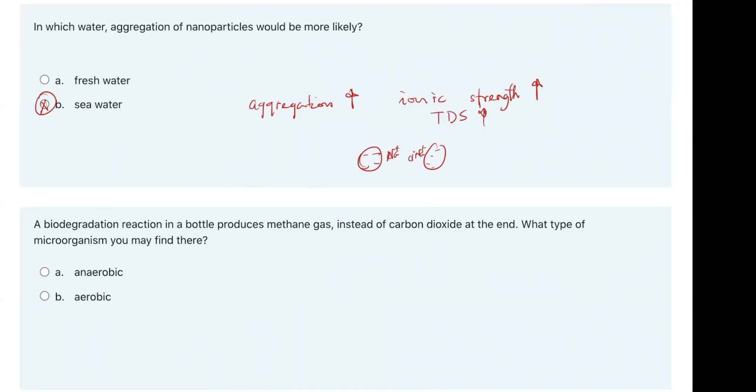One question was: in which water will aggregation of nanoparticles be more likely? The answer is seawater. The reason is that aggregation increases if your ionic strength, or concentration of salt, dissolved salts, or TDS (total dissolved solids), increases. Dissolved salts are more present in seawater, ocean water. The idea is that particles have a similar charge, so positive or negative, and they will repel each other. But if you have lots of ions - let's say Na+ - they will shield that charge, meaning the particles will not feel that charge anymore. So the repulsion will be less, meaning they are more likely to stick with each other.

Second question: a biodegradation reaction in a bottle produces methane gas instead of carbon dioxide at the end - what type of microorganism might you find there, aerobic or anaerobic? Aerobic means oxygen, anaerobic means no oxygen. If it's aerobic, carbon reacting with oxygen usually produces carbon dioxide. If it's anaerobic, it goes to CH4, meaning no oxygen. So since it produces methane, it has to be anaerobic - definitely not aerobic.

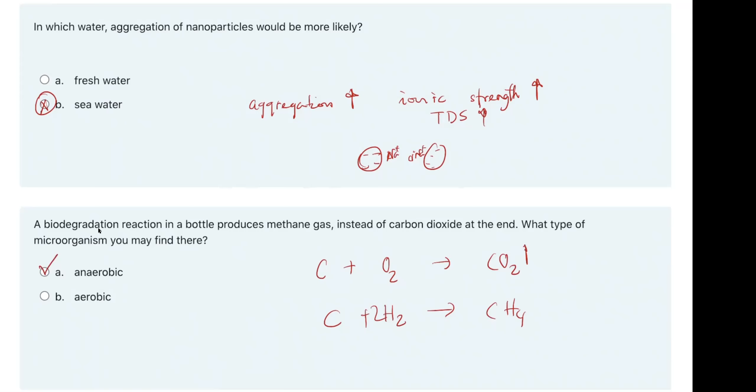The third question was: a chlorinated organic is more persistent than a fluorinated organic, assuming both chemicals have similar numbers. True or false? Think of it this way: chlorinated means it has a carbon-chlorine bond, and fluorinated means a carbon-fluorine bond. Which one is more persistent depends on which bond is stronger and harder to break. Since this is a covalent bond, strength is based on electronegativity. Fluorine is the most electronegative atom, so it attracts the other atom more efficiently, making the carbon-fluorine covalent bond the strongest, and therefore the more persistent. So the statement that chlorinated organic is more persistent than fluorinated is not true - the answer is false.

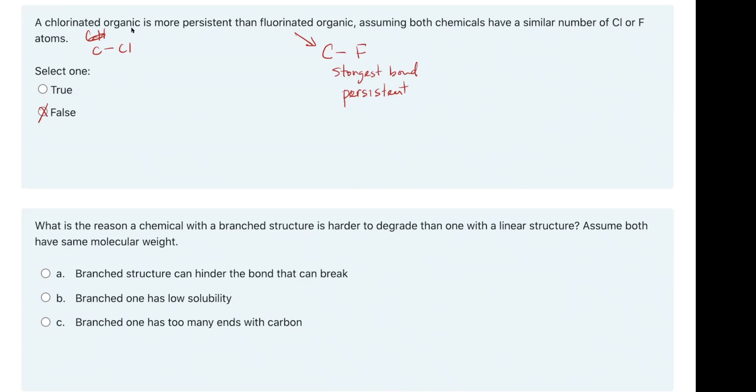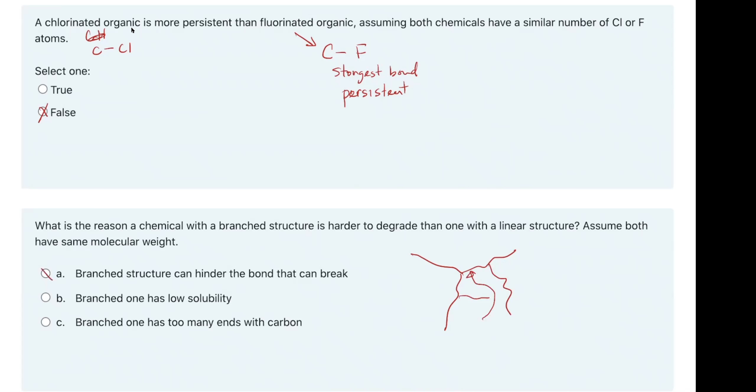What is the reason a chemical with a branched structure is harder to degrade than one with a linear structure, assuming both have the same molecular weight? If you think of organic carbons with a lot of branching, the branched structure can hinder the bond that needs to break. A branched one has too many ends with carbon, but that doesn't really change degradation. The key point is that branch structure can hinder the bond that needs to break. So if it's a branched structure, microbial enzymes have to break this bond, but they don't access the bond very effectively. That's mostly how you can explain it.

Root uptake rate is not affected by the following factors: transpiration rate, concentration of pollutant in soil, and concentration of pollutant in water. If you have a tree, how much pollutant moves into the roots? Transpiration rate is how much water it can draw, and most pollutant uptake through roots happens through water, so that option cannot be the answer. Concentration of pollutant in water is obviously a driving factor, so remove that too. That leaves concentration of pollutant in soil as the right answer, because the pollutant in soil itself doesn't move - it has to move out of the soil first, so it doesn't directly affect uptake. That's the most likely answer.

Is phytoremediation technology the best or the least expensive among all technologies? Select one - well, there's no real option to consider here. Looking at the slides, this was shown to be the least expensive option.

Which one of the following processes doesn't involve taking pollutant inside the plant root? Phytovolatilization, phytoextraction, phytostabilization. Phytovolatilization means you enable volatile pollutants to escape to the atmosphere - usually that goes through the roots and then leaves the system through leaves. Phytoextraction is where you take the pollutant from soil and extract it by harvesting the plant, so that also goes inside the plant. Phytostabilization is where the root system changes the pH of the surrounding environment, allowing pollutants - particularly heavy metals - to precipitate. That happens outside the root because it involves changing the water chemistry. So this is the answer.

Phytostabilization changes pore water pH - I already explained how it can stabilize pollutants this way. So the answer is true.

The last question: nanoremediation using zero-valent nanoparticles - this type of nanoparticle is more efficient in saline groundwater. This is the exact opposite answer to what I discussed previously. The reason zero-valent nanoparticles are efficient is about delivery, and the biggest problem of delivery is aggregation. Once particles aggregate, they get removed from the system because they can be filtered out. So saline conditions actually cause more aggregation, making this answer false.

Out of the 9 quiz questions, many of you scored well, with an average around 90%.

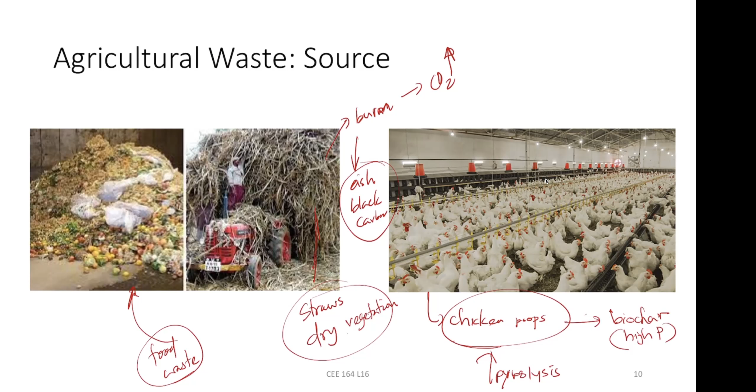So if you take the chicken poop, you can pyrolyze it. If you pyrolyze it, you can produce biochar with high phosphate. And if you remember, phosphate is extremely difficult to get because it's limited - phosphorus doesn't cycle, we get most of it by mining, and there's a limited amount available. So this means we can reuse it through this process.

Professor: how does animal excrement management differ from human discharge management? Well, if you're talking about animal poop, psychologically it's less of an issue. Everything has pathogens, whether human or animal poop, but compositionally it all has nutrients - nitrogen and phosphorus rich. That's why animal poop is used for composting, whereas human poop, psychologically, is something bad for us, so we don't really use it as a nutrient source.

But in return, if you think about how this actually happens, most human poop goes to wastewater, and that wastewater turns into biosolids, which then become fertilizers. So it goes through a certain process that removes a lot of pathogens. I don't think we can manage human waste the same simple way - that's the only difference. Did this answer your question?

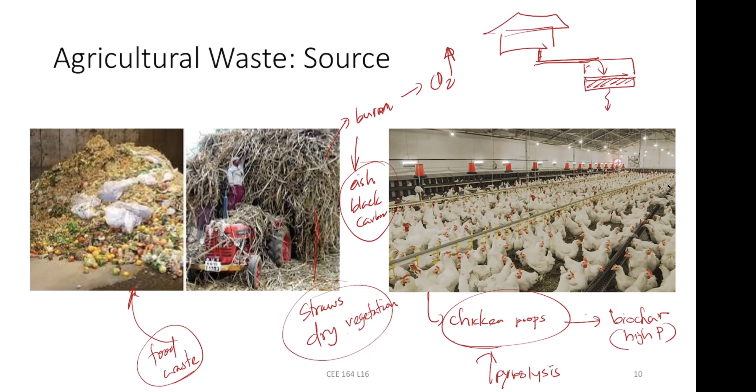Once it's filled, it takes many years, obviously 10-15 years. Once it's filled, you replace it with another location, but we don't use it - that waste is already there. That's the reason, because psychologically nobody wants to do anything with that. But for a large city, we use it as a biosolid, so we are applying those back.

And this is another type of waste - this is the lagoon I was talking about. If you have ever visited any cattle farm, they live there, meaning they are not going to go to a restroom - they won't say 'okay I'll go to the restroom' - they'll just poop and pee there. So they have this water system where the farmers clean the floor using water. They have to remove the cattle, clean the floor, then bring them back. That mixed water, the wastewater, is dumped into this system like a lagoon.

And as you see over here, that's not because of the waste - it's because of the bacteria or pathogens, a certain type of algae that grows here. That's one algae that doesn't look green - so you see over here.

But the biggest challenge here is not the pathogens, because you can remove them from a treatment system. The challenge is the antibiotics and hormones, particularly antibiotic resistance genes, because a lot of these animals take antibiotics at much higher concentrations than needed, and those end up in the waste. So if you have lots of antibiotics in this waste, any bacteria living there become conditioned to that system. They develop this antibiotic resistance gene, or defense mechanism. That means if those spread around the world, and we get infected by these pathogens, we can't be cured with the same medicines we normally take. That's why this is a really big challenge nowadays.

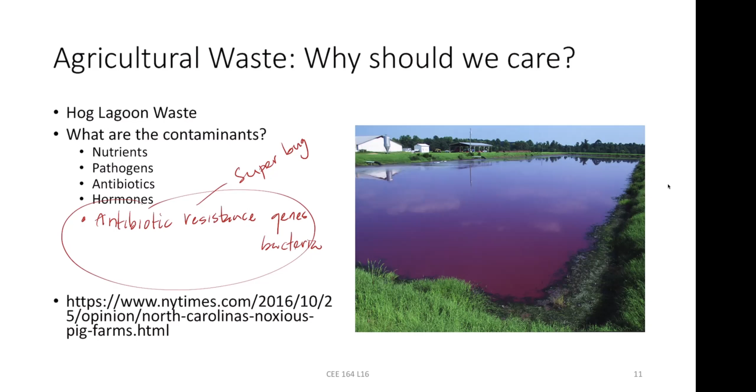And just to give you an idea, there have only been three or four kinds of new human antibiotics developed in the last 50 to 100 years. So it's really expensive and difficult to develop antibiotics. Once we run out of those antibiotics, we can't keep up - bacteria evolve faster than we can develop antibiotics for. That's why this is a big concern now: how we can minimize these resistance genes from becoming common. One of our professors, a colleague in our department, Professor Jenny J., is working on this particular field much more than any of us.

All right, so we discussed this one, how the waste is being managed. The solid goes here as you see, solid waste is directly applied to the field as fertilizer if it is pathogen-free, if it is dried, or by any other possible way. Otherwise, it can be kept in locations and disinfected, and then applied. But if it's a liquid or mixed liquid, then you have to put it in a lagoon. Some of it can also be put in a digester or storage structure before you discharge it into land applications.

This is feasible if there are no antibiotics or hormones involved. But if there are pesticides, antibiotics, and hormones, then you don't want to apply those in agriculture, because then you are spreading the same thing—basically taking medicine without being prescribed. So that's one of the challenges. With all these things, you can produce waste, or be exposed during production, collection, and transfer, so be aware of those aspects.

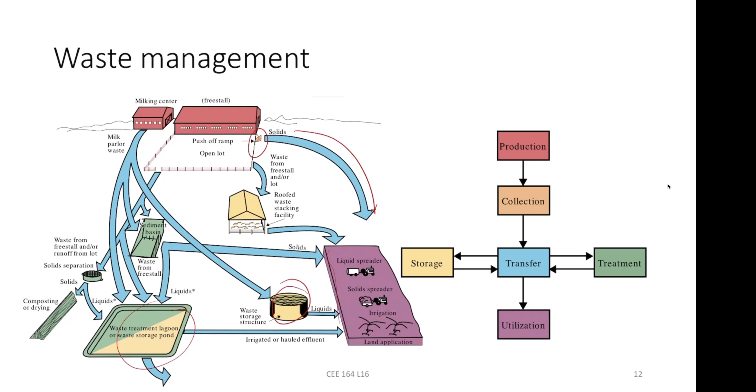This is just to give you the amount of food loss, which is another agriculture loss—almost 50% of what we produce is wasted. Worldwide, the reason is that unlike the US, many developing countries where a lot of people live do not have cold storage. That means any seasonal food they produce, they have to eat it, and there is a limit to how much they can consume, so most of it gets wasted.

And then also, even in a country like the US, because of supermarkets and such, we tend to buy products which are very specific—look how they look, all that stuff. So that means even a carrot which is perfectly fine, but just because the shape is a little curved, gets wasted. There's really lots of waste even before it comes to the consumer.

Once it comes to the consumer, there is another type of waste. We buy a lot more than we need, or we buy and forget to cook it, and it becomes waste. Then when we cook it and don't eat it, that also becomes waste. So food waste is typically a lot more than what we think, which is amazing when you consider how many people are dying because of malnutrition or lack of food. Here we are wasting food, and it's not just one country, it's many places. It's a supply issue as well as transportation to the right locations.

We discussed this before, but I want to reiterate: if you have food produced at home, in a business, or at restaurants, if it's biodegradable, you have to manage or find a way to transport it. If you transport it to a location where it can be reused or used for energy harvest, that's useful. It goes through some pre-treatment, then pasteurization, just to make sure there are no pathogens, so it can be used or stored for a longer time.

Then it goes to the digester—you can call it an anaerobic digester. It produces biogas, and that gas is stored, then you can heat it or use it in an engine to produce energy. That energy can go to electricity and provide lighting. After the digester, you also have a waste product—every digestion produces some kind of solid waste that can be used as nutrients or fertilizer.

This is a different process: you separate liquid and solid, and it becomes solid nutrients. Then you apply it on the farm or park, and the park produces organic waste or biofertilizers. Then you produce food, which goes to restaurants and everywhere else. Some food can also directly go to the digester if it's food waste. Any natural gas produced can also help supply energy or fuel for automobiles.

There are different current technologies we can talk about—anaerobic digesters we already discussed, so I won't repeat that. There's something I usually do in class that may not be relevant here; maybe we can discuss it after class, covering different new ideas on how to manage food waste or challenges. For now, let's go through these slides, then we can have an open-ended discussion.

As I said, all this waste—this is just one cycle of how we can produce food waste and energy. But it doesn't have to be just food to energy; it can be a multiple stage process. Food can make something, and that can be used, and that waste goes to another production.

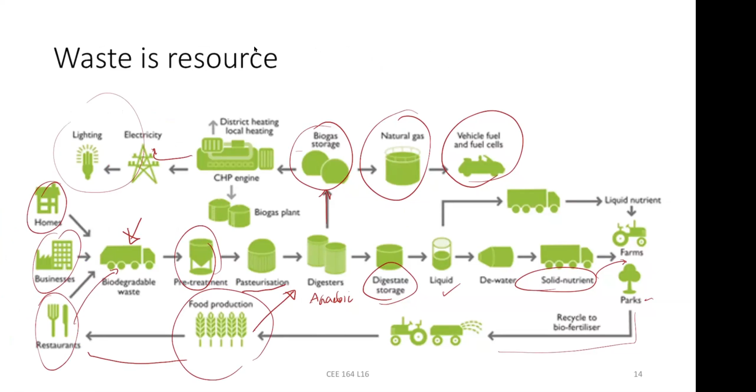So all those steps can be done, that's why there are different options. For instance, plant waste doesn't have any pathogens, doesn't have much contaminants, so it's a lot easier to produce black carbon or biochar as filter materials.

Then if it's a lot of liquid, you can treat them as wastewater, or create algae like we learned in the last class. And the remaining products, if it goes to a digester, most of the stuff is already produced, or you remove carbon as a fuel, methane gas or fuel.

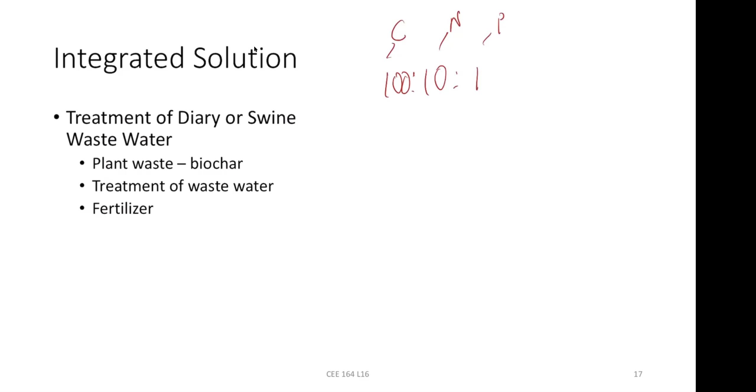Every carbon material, if you think of our body, 100%, the typical ratio is 100 to 10 to 1. So this is carbon, this is nitrogen, phosphorus. So this becomes methane or biofuel.

What about nitrogen, phosphorus? This becomes fertilizer. Okay, so that's the whole idea here.

So if you don't want to do any of this, you can burn all of it or pyrolyze it, and that produces biochar. Biochar is a carbon sequestration product, in the sense that if you just leave this food waste, it becomes carbon dioxide or methane gas within a few days. Whereas if you make it biochar, the carbon is locked for the next 100 plus years. So that means this carbon will not go back to carbon dioxide anytime soon.

So you are disrupting that cycle, meaning you are keeping more carbon as a solid, as a sequestration product underground. I think that's all in terms of food waste.

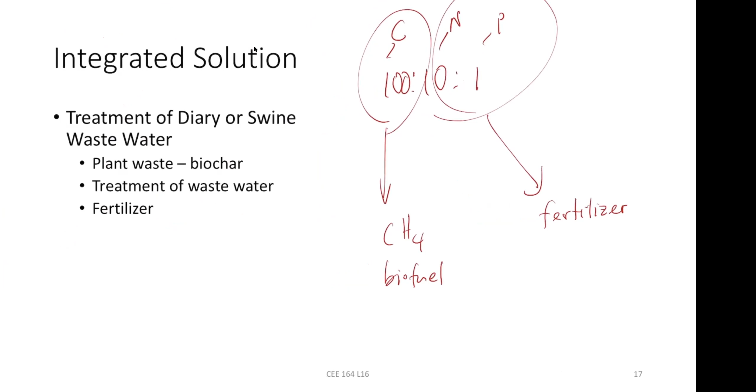So now let's discuss this one. Again, this is an open-ended discussion. What we should do is think of some challenges or solutions. So let's think of some challenges. It doesn't matter which team, since I can't see who is team A or B right now. So let's have a discussion about what's the biggest challenge you guys can think of now that you've learned how this is managed. What could be the challenge for food waste management?

Challenge and opportunity, let's write it this way. Not team A, team B, I'm going to write what's the challenge and opportunity. Opportunity means solutions. Okay, so whatever comes to your mind, it doesn't have to be in any order.

I feel like a big challenge on the consumer end is that sustainable management of food waste kind of relies on the consumer deciding to compost their food rather than just put it in the trash. And it relies on the consumer being knowledgeable enough to understand what things can or can't go into the compost. Yeah, I think that's where it starts.

But let's think of who is the biggest, or not. Let's not say consumer, it's more about who is the biggest producer of food waste. Consumers like us, single households, are definitely a source of food waste production, but what about others? So consumer or producer.

But to create the materials required to harvest solar energy, like solar panels, there is a lot of waste. The production of solar energy consumes resources and has a carbon footprint, and once you install all these solar panels, how long will they last, and what will you do with all the waste? So there has to be some life cycle assessment for that. Then there are other types of waste—if you think of petroleum, the extraction and purification all has lots of waste. The biggest energy production here is coal, and coal produces lots of waste like coal ash or fly ash. So there has to be an important way to manage this waste.

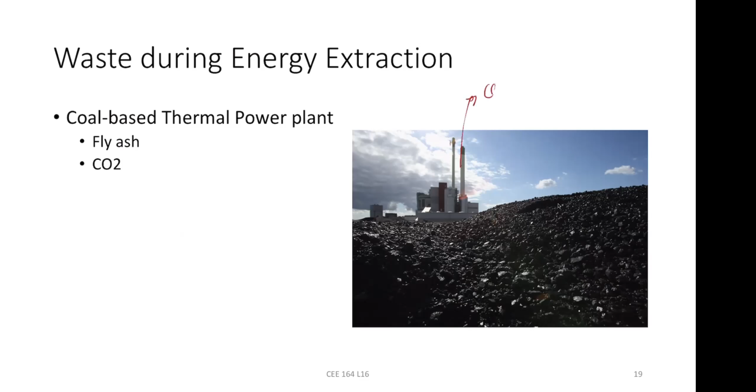These couple of slides will discuss more about how to manage this waste during energy harvest. For instance, here's an example of a thermal power plant, where coal is the raw product—you burn the coal, get heat energy that creates steam, and the steam is used to produce electricity via turbine. The biggest waste you get is carbon dioxide, so CO2 goes there, and what's left over is ash—the fly ash. But fly ash can be used in multiple different ways. So if you see, what's the difference, what's the common between these two pictures? Anybody can say? Guess.

What's common between these two? What do you see over here? On the left side is a building filled with all this coal ash, after a spill in the Kingston fossil plant in Tennessee. And on the right side, you have this big colosseum.

Take a guess, one word is used in between those two captions. Is it that the Romans used different forms of ash in constructing their buildings, as the type of concrete they used? Exactly. So if you think of what they used to make this big colosseum, or the clay they used to make the structure stronger or last longer, it's made up of ash.

So this just gives you an idea that every waste you produce may have some use before even you find something else to do with it.

As an example, 130 million tons of coal ash was generated in 2014. It's been increasing, but over time we are lowering the amount of energy produced by coal, so as that decreases, the amount of coal ash is going to decrease. It's declining now - the number of coal power plants, at least in the US, is a lot less. In fact, in California, I don't think there are any coal-based productions.

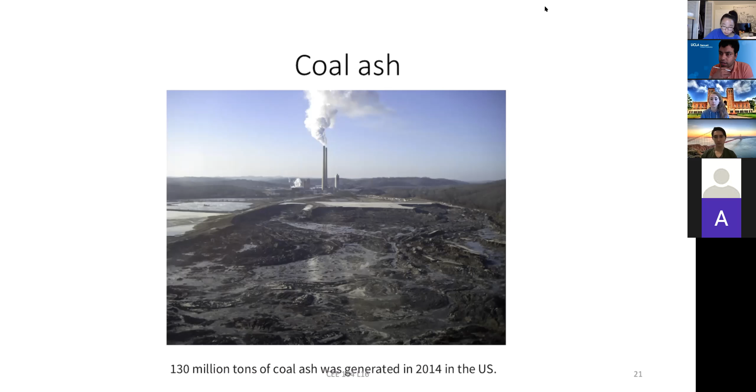So what is in the coal ash? It's basically many inorganic minerals - calcium hydroxide, calcium carbonate, sodium, calcium carbonate, magnesium carbonate, and oxide hydroxide.

That's why ash has a very high pH, around 11 or 12. That's the reason cement pH is also high. If any water goes through cement, the pH is alkaline, around 10 or 11. So if you get concrete and put it in water, the pH will rise because of this ash.

But if only those things were there, it wouldn't be a problem - it also has lots of metals. If you think of it, our body needs some micronutrients, but also has traces of mercury and arsenic in small amounts. Fish and other organisms accumulate mercury, and plants also have some amount of mercury. That's why every time there's a wildfire, you see a spike in mercury concentrations.

Once you burn all of that, 90 to 99% of the mass is gone - all the carbon is gone. So what remains is a concentrated form of these inorganics. That's why the concentration of heavy metals is much higher in ash, because of that concentration process.

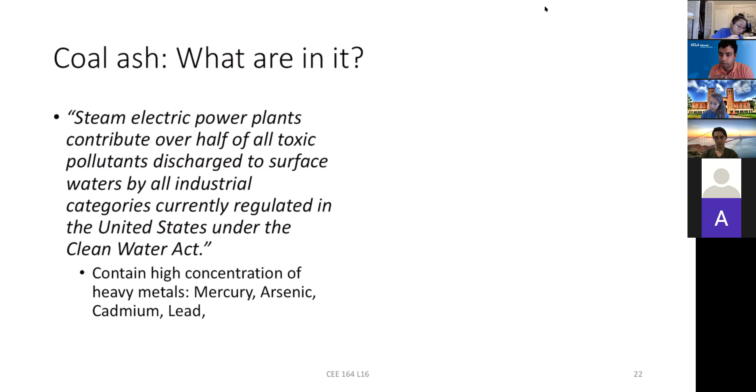So if all this ash is loaded into a river or disposed of, you'll have all these metals released. You can see this in the picture - if you have a power plant, you create a big ditch where you dump all this ash, and build a wall to protect it. But over time, with much rainfall and other factors, if that wall fails, the whole entire ash - tons of it - will be washed out.

One thing I want to say is that coal ash has more metals - if your soil, let's say on a property you're buying, has that much metal concentration, it would be considered hazardous, and nobody could live in that area. That soil would have to be disposed of in a landfill because it's such a hazard. Coal ash has much more metal than that, but it's not considered hazardous. So I think the reason behind that is not a science reason - it's mostly an economic reason.

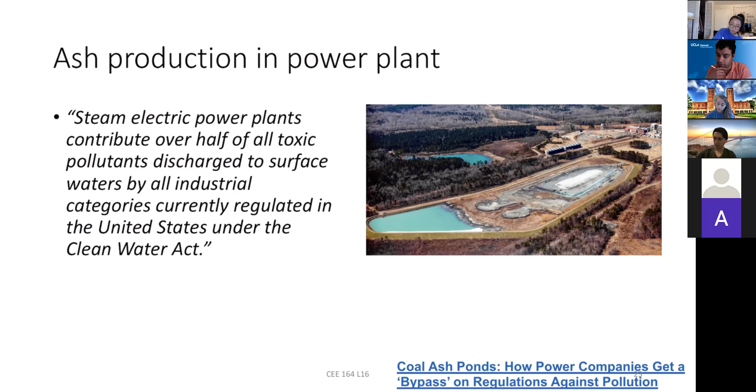If you make coal ash a hazardous substance, all the coal power plants will go bankrupt because now they are producing ash which is hazardous. They have to pay for it, so it becomes very expensive, and you pay much more for the electricity bill. So you can see there is always a policy decision when it comes to coal power plants and coal ash not being classified hazardous. It's not really about concentration, it's more other reasons.

Basically, bottom ash means everything after burning that comes down. So that's the bottom ash. When you're burning, the temperature is so high that you create this fume, so very fine particles, smaller than 1 micron or around 1 to 2 microns, will fly across. So that's why it's called fly ash, not for any other reason, just because it flies around.

Then there's the ESP, or fabric filter. Basically, the fly ash has a certain charge, it develops static charge because the fly ash particles hit each other, so they are very charged particles with high temperature. So you create this capacitor, or plate, so they stick to that plate, and everything falls down. That's how you filter it electrostatically.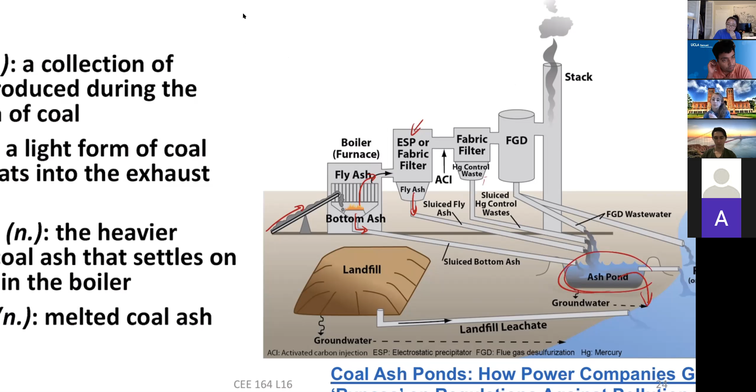All right, so this is the issue. If you click on these articles, it shows this big ditch was here. This wall fell, and that's how everything was released into the rivers and got into the systems because of these issues. This was big news at the time, partly because it entirely contaminated Tennessee rivers and polluted most of the area. There were not many regulations on how they could create this ash ditch and manage it.

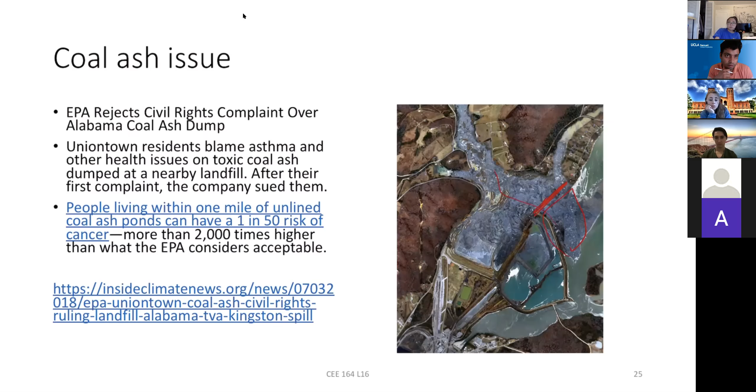This is not the only time it's happened. In fact, this kind of accident because of coal ash has been happening at least once every 10 years. But still, many states don't have strict regulations, and that has ended up causing these issues.

So that's why it is important how to dispose it, but most importantly, what can you do to reuse it? These are the different ways I'll show you. The biggest reuse is you can use this coal fly ash to make concrete or cement, all that stuff.

You can also use fly ash. As I said, the pH is very high, so you can use that as a way of lowering or increasing the pH of any system where the pH is very high or very low.

So which place has a low pH? It's the place where you do acid mine drainage. Every time there's a mining operation, because most mines are based on sulfide waste ore, those sulfides, when they dissolve, become sulfuric acid. That's the reason anytime there's a mining operation, those waste products produce a high concentration of sulfuric acid. So acid mine drainage is a big problem in all mining areas.

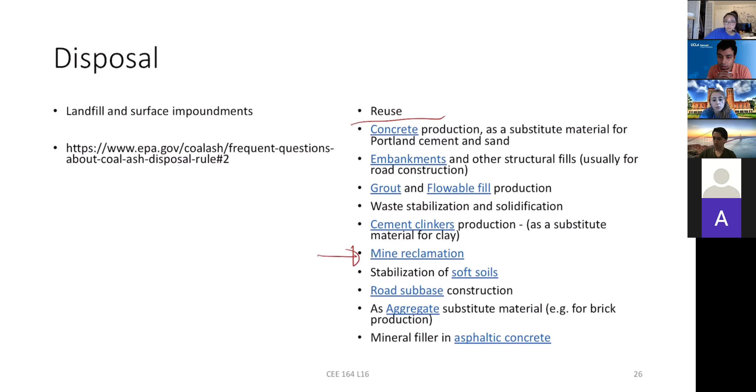Because of the low pH, you can take all this ash, which is high pH, and mix them together so that you can make the pH a lot more balanced. So mine reclamation is one of the reasons for that. If you click on all those links, you should be able to find the different uses.

Another thing I want to say is this coal, like anything else, is enriched with rare earth elements. Now the Department of Energy has a big incentive about how to extract these rare earth elements from coal ash. Just to give you statistics, rare earth elements are used for every smartphone, every electronic device, every car, solar panel—name it, every possible way.

And 99.9% of rare earth elements comes from China. So that one country controls everything. If China said tomorrow that they will not give any rare earth elements, everything stops.

And that's the reason why the US is not producing rare earth elements—because the extraction process is very expensive due to environmental regulations. It uses a high concentration of acid and solvent, and it's not environmentally friendly. That's why no country does that.

Also, there aren't many mountains which you can dig to find rare earth elements. So China has this strategic advantage because of that reason. That's why the US and many countries are now finding alternative ways to get or harvest rare earth elements from coal ash or coal.

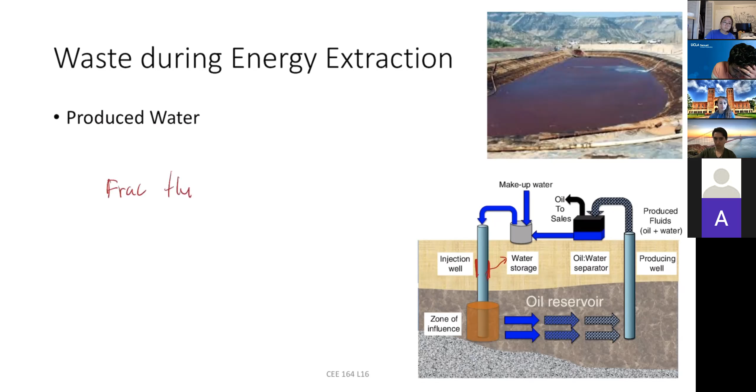One thing I didn't tell you here is that the injection water, or frac fluid, is made up of water, that's about 95%, you can check that, exact number I don't know. Then sand particles to keep it open.

And the other thing I didn't mention is the salt, extremely high amount of salt. The reason you use a high amount of salt is because, as you just answered in the quiz, if you have lots of salt, the small fine particles will bind together, so there will be not much colloid. They don't want any kind of fine particle to mobilize in the system, because if it mobilizes, that becomes clogging. So that's why they use a high amount of salt. There's other reasons too. So it's extremely high salinity, almost saltier than seawater. So think of that, it's a very high amount of salt.

And then you have antimicrobial chemicals, and then anti-corrosive chemicals. Okay, so all these mixed together and being pumped into the injection well, and then you extract it.

There will be a lot of salt too, because in the aquifer, those aquifers have a lot of salt also. So you get this highly salty fluid with the oils and gas and many other things. So you extract the gas, you extract some of the oil, and the remaining amount will be dumped into these locations. So what do you do with this produced water?

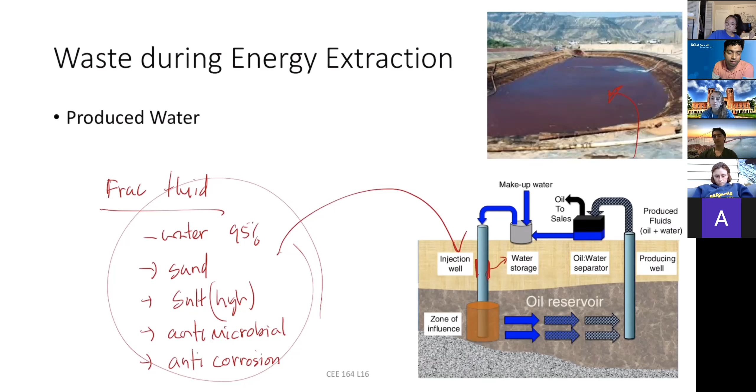But they leave it behind for a long time. If you think of these remote areas, wildlife and all those things, the consequences are much more severe. That's one of the reasons people don't like this kind of operation. It has a big footprint once they leave the system.

All right, the last one is nuclear. This is, I think, the cleanest energy, we talked about that last time. The reason is you use nuclear fuel which is already extracted for power, for all the wrong reasons, but the entire reactor is contained here. Everything else is not contaminated, it's just water being transported.

The main reason nuclear power plants are always near coastal areas is because of the cold water from the ocean, you can use that water as a circulation coolant a lot easier. Or any place with enough water to cool it down. But there is no other waste.

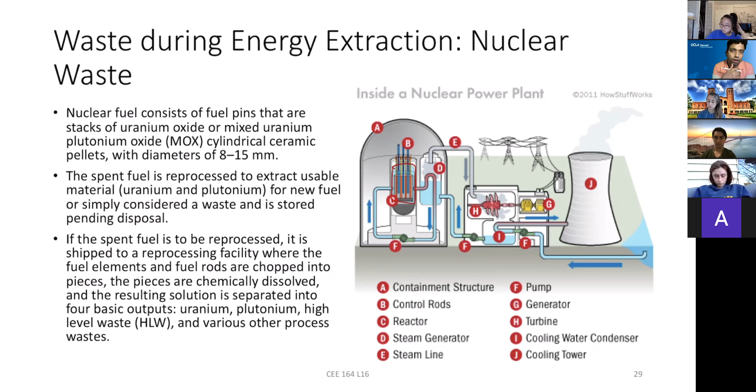If you realize, the amount of energy we can get from a nuclear power plant can actually supply most of our energy for many years, several hundred years. We don't even need any other form of energy. But that's just a challenge because of the risk involved, and psychologically, if anything goes wrong the consequence is devastating. That's why there isn't much public support.

This is just to show you the type of waste being produced. These are the nuclear rods that are lowered into the chambers. Based on how far they're inside, that produces the energy. When you want to lower the energy, you move the rods out into this liquid to cool it down, so that's why it always stays there, and there's a supply to keep the outside cooler.

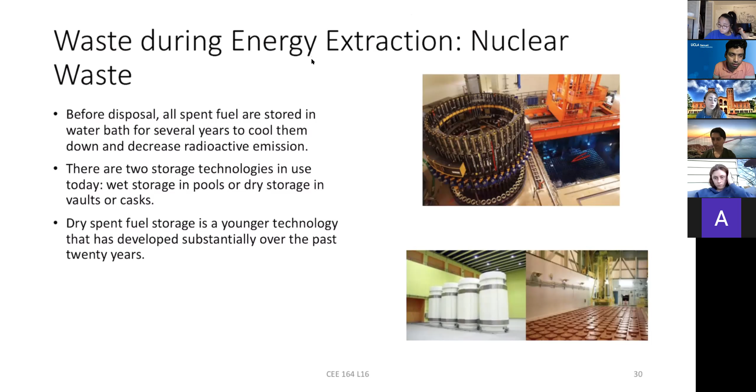Bill Gates has invested in eradicating many diseases, and he's also invested in producing medical devices. If you think of X-ray and a lot of different things, this low-level nuclear waste produced in power plants, after it's used, can be taken and used to produce medical radiation devices for medical applications. This is another thing they are working on, you can search online.

So you can see, if we know what the challenges are, we can really solve many of the waste issues. We just need to have that mindset.

We don't account for that a lot. When you think of solar energy, it also requires the highest amount of water - a lot of water, because the efficiency depends on the solar panel being clean, so it has to be cleaned multiple times, and that water is wasted. Some groups are working on how to reuse that water - you can apply this water and drain it into a location that can be used for vegetation or some kind of farming, so you don't completely waste that water. There are ways to think about this and make it a circular economy.

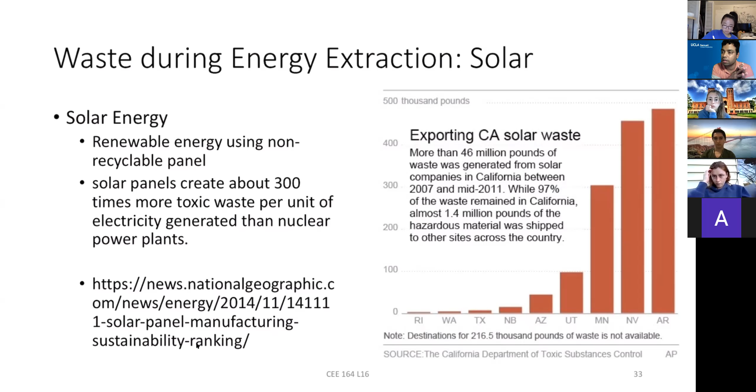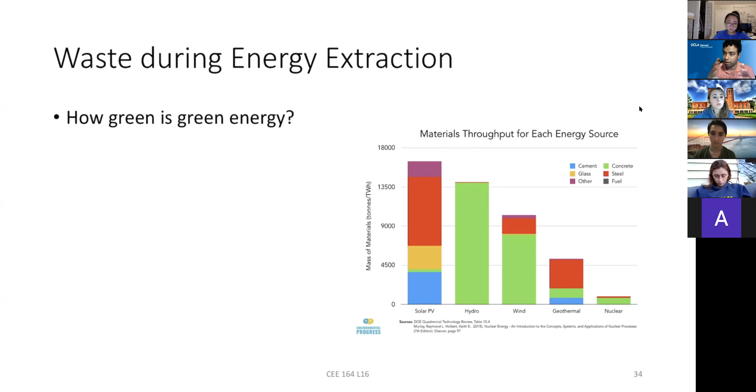So that's the whole idea. At the end of this class, I hope that you get a sense that anytime you think of waste, materials, or any production, think of what raw materials are being used, where it's coming from, and also what's the end product, what waste is produced, and how it is managed. Then only can you see the actual cost of that production.

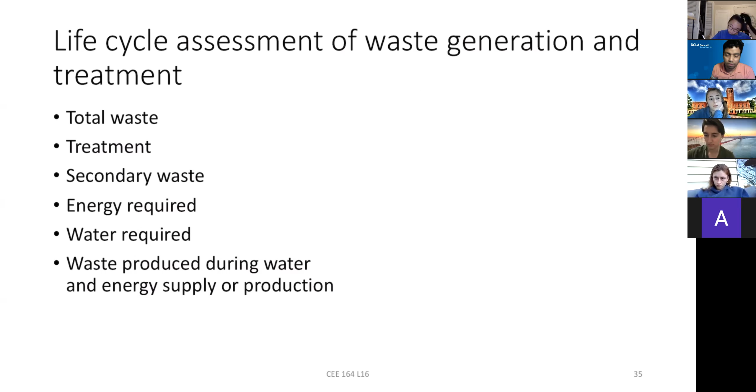We want to end this class with Bill Gates' visions about how you can use nuclear energy for medical devices. Okay, so I'm going to stop sharing this one, and let's see, there is a chat window.

The last slide said the company sued the people for complaining about dumping. William, can you say... I forgot, I didn't see this one until now. Which slide? Slide 25. Okay, I didn't share this one yet, so let's go back to 25.

Oh no, well, I'm sure there will be public litigation. It's not that they're doing illegal dumping. They had the permit. It's just they don't have the right, or they didn't follow the proper protocols to hold it in place. They have the permit—every time there is a power plant, they have a permit to put the waste somewhere. But if they don't really have that structure stable, then obviously this thing will happen.